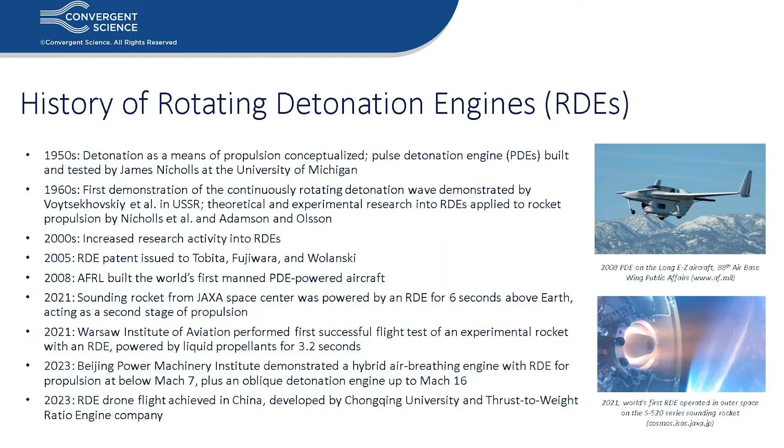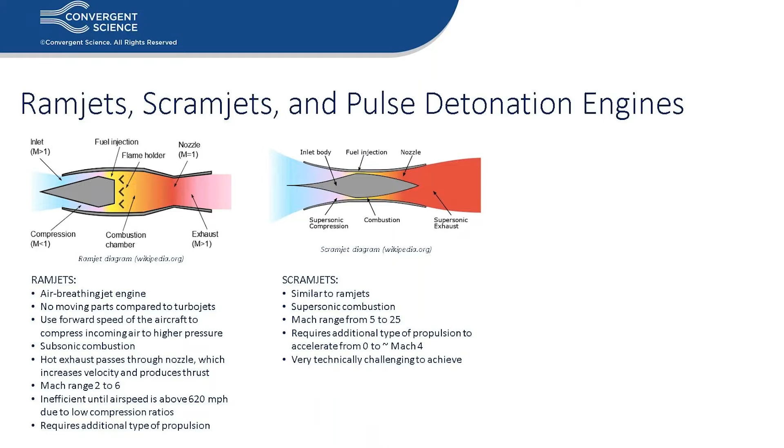Scramjets are very similar to ramjets, but the combustion happens in the supersonic regime. They operate in the 5 to 25 Mach range, and again require an additional type of propulsion to accelerate from 0 to about Mach 4. This is a very challenging problem since it's hard to achieve sustained operation, and hypersonic flight generates a lot of drag and heat.

Pulse detonation engines use a detonation wave, which increases thermal efficiency due to rapid compression of the mixture to high pressures and temperatures. They operate in the 0 to 4 Mach range, so they can be used to bridge the gap between subsonic and hypersonic regimes.

The thrust is proportional to detonation frequency, and detonation combustion can happen through either direct initiation or from deflagration-to-detonation transition (DDT). The main challenges are the very large amounts of energy required for direct initiation, or if using DDT, you need a long enough combustion chamber to achieve detonation. PDEs also require repeated initiation of the detonation, and the timing and control of fresh reactants into the chamber is very hard, resulting in a very limited operating frequency.

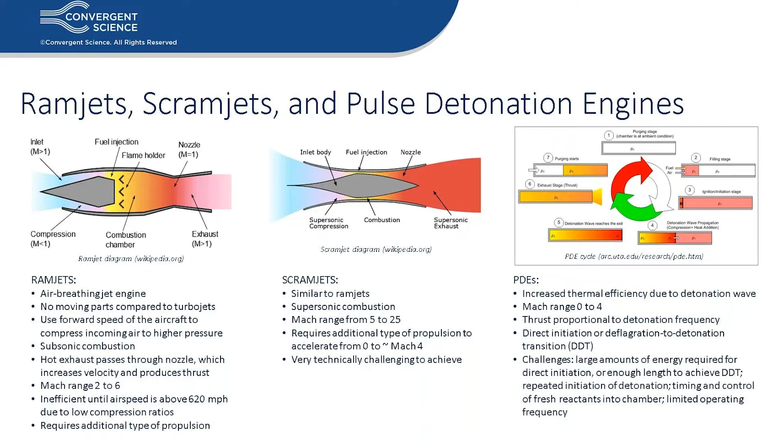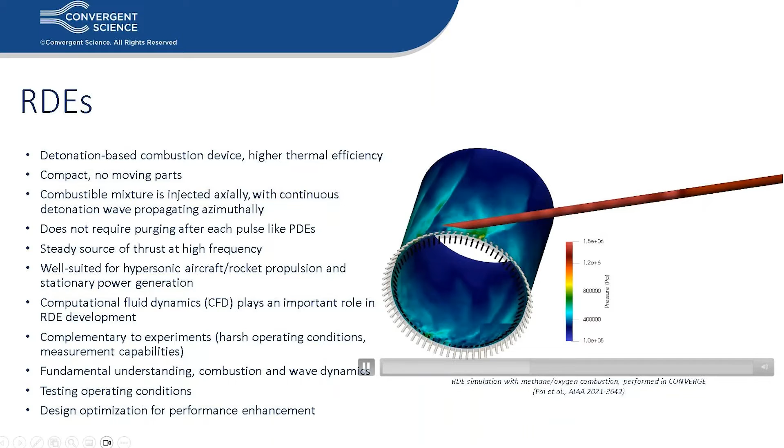So this is where rotating detonations come in. RDEs are essentially detonation-based combustion devices which achieve higher thermal efficiency due to using detonation. There are no moving parts, and the engine can be made very compact.

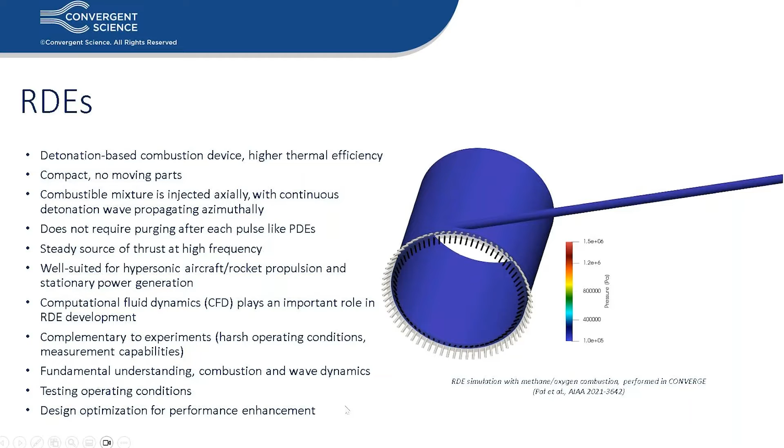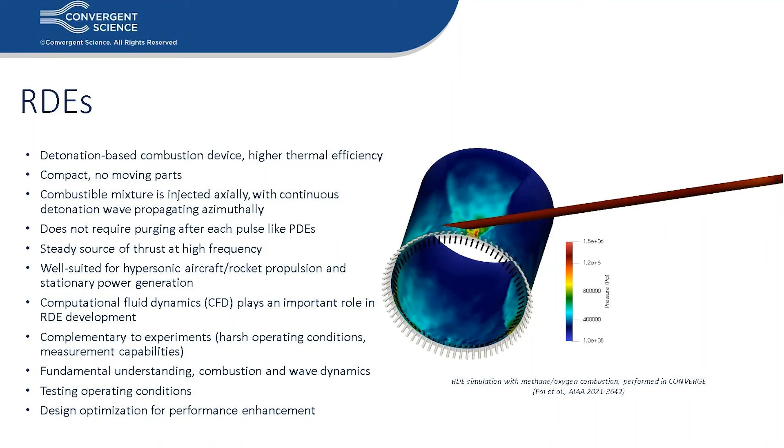The combustible mixture is injected axially through the nozzles, and once ignition is initiated, a continuously moving detonation wave or waves propagate azimuthally around the combustion chamber, as you can see from the movie. It does not require purging of gases after each pulse like PDEs do, and it can offer a steady source of thrust at high frequency once the detonation wave is established. It is well suited for hypersonic aircraft or rocket propulsion, and also for stationary power generation.

CFD plays an important role in RDE development. This is complementary to experiments where the engine encounters harsh operating conditions and certain measurements cannot always be achieved due to current measurement capabilities. CFD allows for fundamental understanding of the combustion and wave dynamics of RDEs, and we can test many different operating conditions as well as optimize the design for performance enhancement.

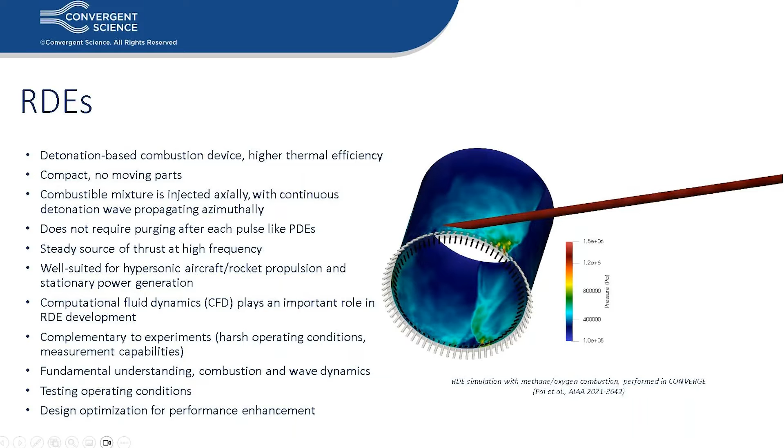So why should you use Converge for RDE simulations? Converge CFD has the capability of very accurate combustion simulation using our SAGE detailed chemistry solver, which you can also activate in regions where combustion is important to reduce computational expense. We have detailed reaction mechanisms through the Computational Chemistry Consortium, or C3, which include PAH and NOx chemistry, and tools for generating surrogate and multi-fuel mechanisms, including jet fuels.

Our code also does not require any meshing from the user. The mesh is created during runtime automatically. We also have Adaptive Mesh Refinement, or AMR, capability for variables like pressure, density, and velocity.

And this is very important as there is a wide range of scales in RDEs. For example, detonation cell width is about 1 to 1,000 millimeters. For example, with hydrogen-air combustion, the detonation cell measures about 10 millimeter at an equivalence ratio of 1. Nozzle diameters being about 1 millimeter, annulus width 5 millimeter, channel height 50, and detonation tubes being about 400 millimeter.

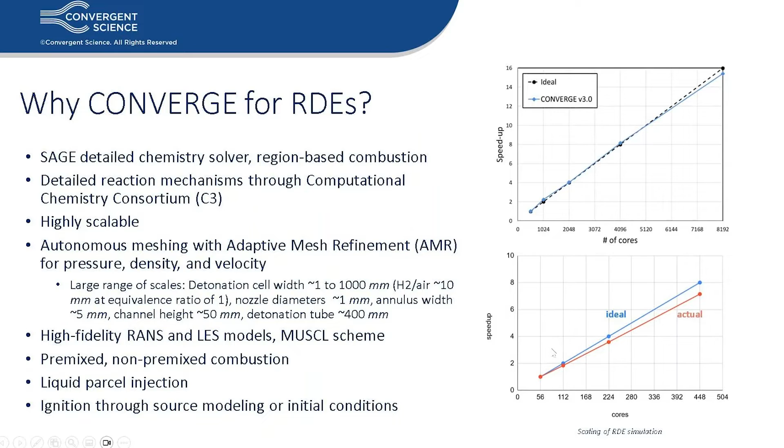So let's switch gears a little and talk about the differences between deflagration and detonation. Deflagration is combustion in the subsonic regime, where essentially Mach is less than 1, and pressure waves in front of the flame travel through the unburned mixture at the speed of sound, while the reaction front, or the flame front, is further behind it, traveling at velocities slower than the speed of sound. The propagation of the flame front is controlled by transport processes and chemical kinetics, and flame speeds are approximately 1 to 100 meters per second.

And in case of deflagration, the pressure decreases across the deflagration. So P2 in the burned mixture is lower than P1.

In contrast, detonation is combustion in the supersonic regime with Mach larger than 1. The pressure wave travels through the unburned mixtures at speeds greater than the speed of sound. The flame front is right behind the pressure wave, which energizes the shock wave. The propagation is then controlled by the shock waves, with flame speeds reaching about 2,000 meters per second. And pressure increases across the detonation with P2 greater than P1 as the shock compresses the unburned mixture.

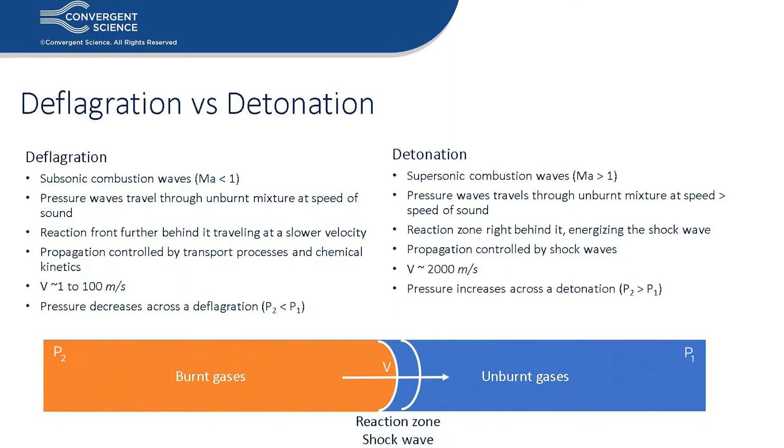So how do we initiate detonation? We can do direct initiation, which requires a high energy source to drive a sufficiently strong blast wave, so it's directly responsible for initiating detonation, but this requires a very large amount of energy.

Or we can do what's called deflagration to detonation transition, or DDT, which is essentially combustion that starts out as a deflagration with a relatively weak ignition source. As the flame develops and becomes increasingly turbulent, it accelerates until a shock wave is formed. This requires time, and the combustion chamber has to be long enough for turbulent mixing to develop into detonation.

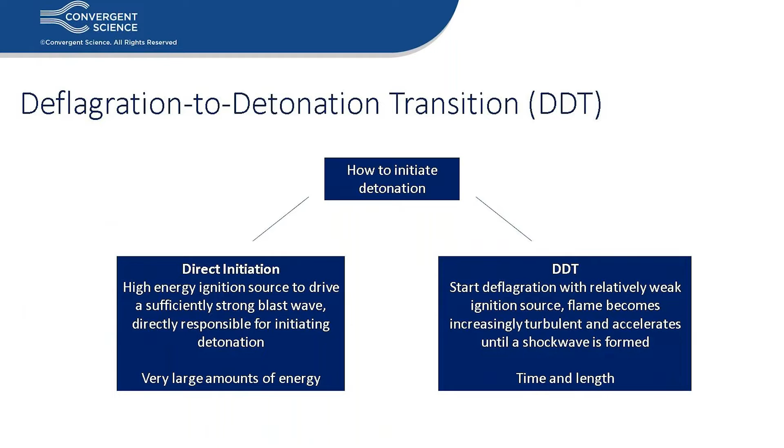So DDT was studied previously in a blocked channel using Converge CFD. The significance of DDT is, first of all, safety, such as storage of fuels or explosive mixtures in mining, in pipelines, and also it is used as a way to initiate detonation devices such as PDEs and RDEs.

There are significant challenges to this type of simulation, including a wide range of length scales from 4 to 10 orders of magnitude, and nonlinear interactions between flames, shock, turbulence, and boundary layer.

So to study this problem, we developed a 2D simulation with an obstructed channel for a controlled numerical study of various stages of DDT. This is to first understand the evolution of the flame and flow field and how to create the right conditions for detonation.

We also want to understand and control the transition to detonation and how to propagate and sustain the detonation wave through the unburned mixture. So on the right, you can see two types of channels.

One is just half of the channel with obstructions on just one side of the channel with some height and thickness. This is known as the unstaggered configuration, and what we do is we control the blockage ratio.

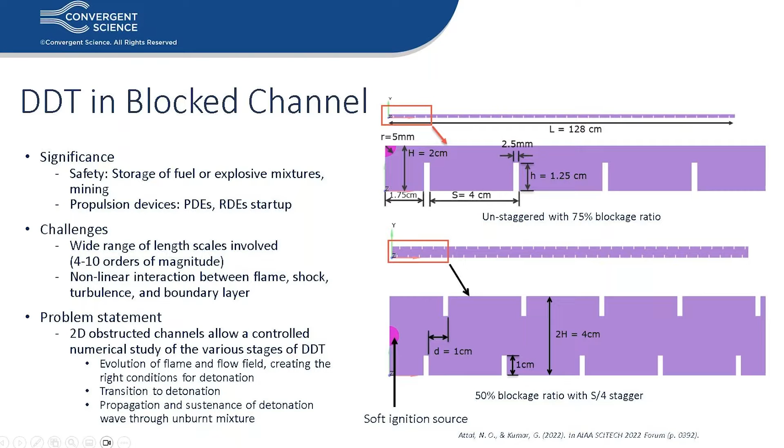So for the simulation, the physical models are as follows. For turbulence, we are using the dynamic Smagorinsky LES model. For combustion, we are using the SAGE finite rate detailed chemistry approach. The mechanism for hydrogen combustion contains 10 species and 21 reactions from Connaire et al.

The mesh settings are as follows. The base mesh is 2.5 millimeters, and we will use AMR for velocity, temperature, pressure, and OH, so that the minimum cell size achieved is about 78 microns, which allows us to capture the detonation front as shown in the figure below here.

So this is the progress of the flame front as time goes on. And you can see that as the flame develops, it becomes more and more turbulent and corrugated due to the interactions with the blockages, leading to increasingly faster flame speeds and developing into a detonation flame front.

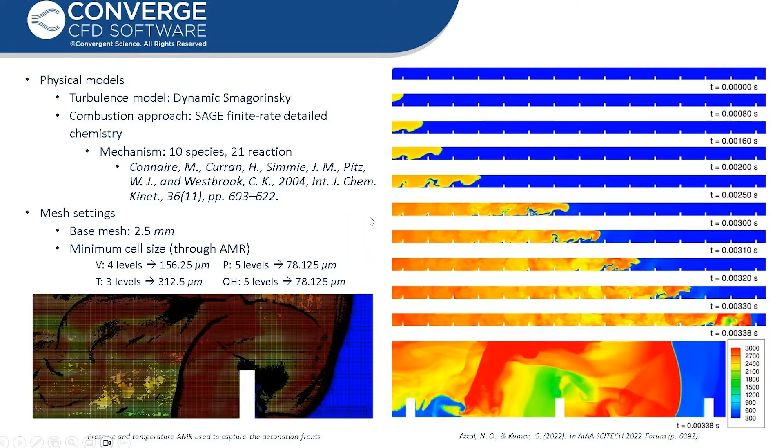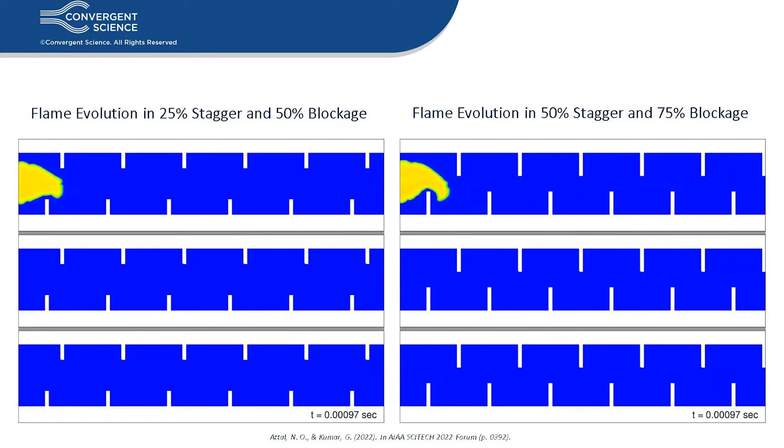So these two videos here show you the differences in flame evolutions with 25% stagger and 50% blockage on the left, and 50% stagger and 75% blockage on the right. What you can see is that the simulation on the right, which has the higher blockage as well as 50% stagger, develops into a turbulent flame much faster.

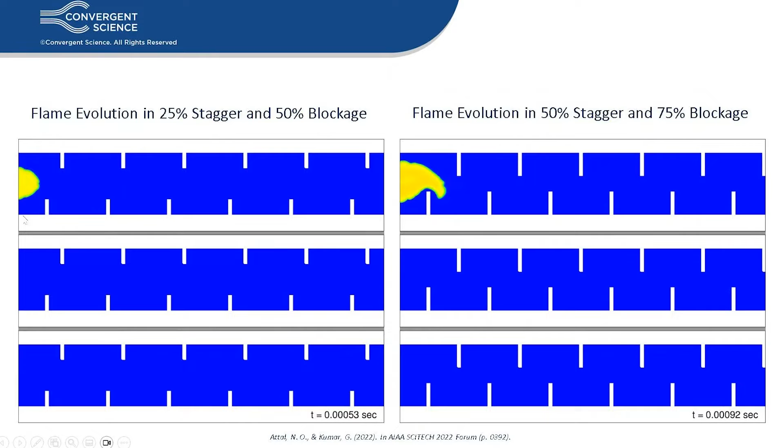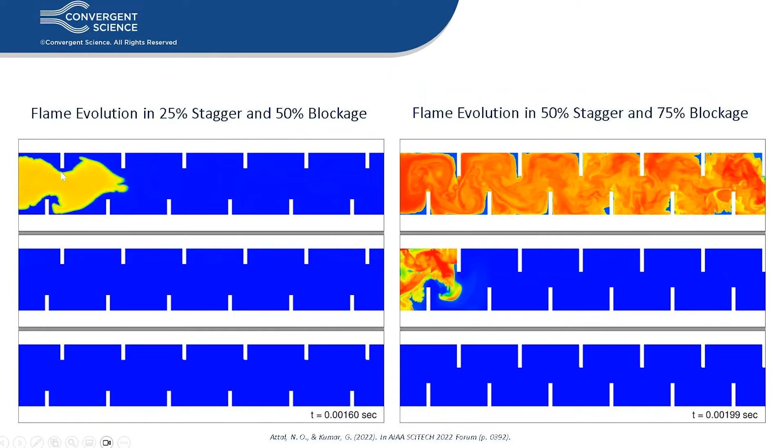This leads to faster deflagration to detonation transition. The simulation on the left still develops into detonation, but it does require a longer time as well as a longer channel length to transition to detonation.

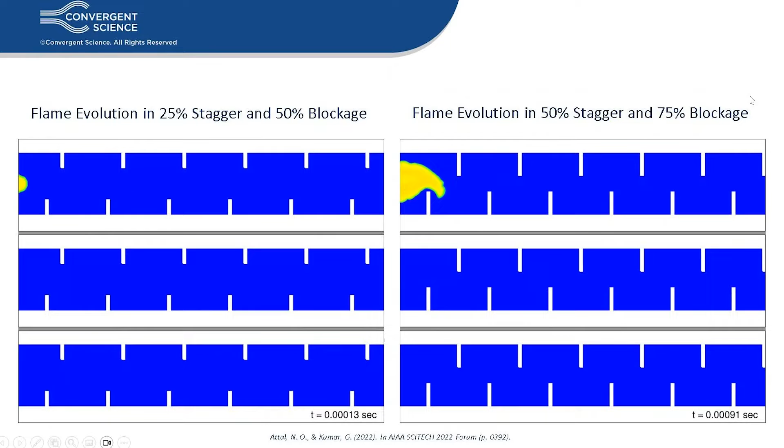So for different stagger and blockage ratios, the flame acceleration appears to be clustered. Each cluster corresponds to the same blockage ratio, but different stagger ratios. The inference we can take from this study is that flame acceleration is strongly correlated to the blockage percentages, but there's a weak correlation, or almost no correlation, existing between flame acceleration and stagger ratio.

This table here shows you the time it takes for detonation to be achieved from deflagration for the different blockage ratios and stagger ratios. One case actually did not achieve any detonation. As the blockage ratio increases for each stagger ratio, you can see how the transition is happening in less time.

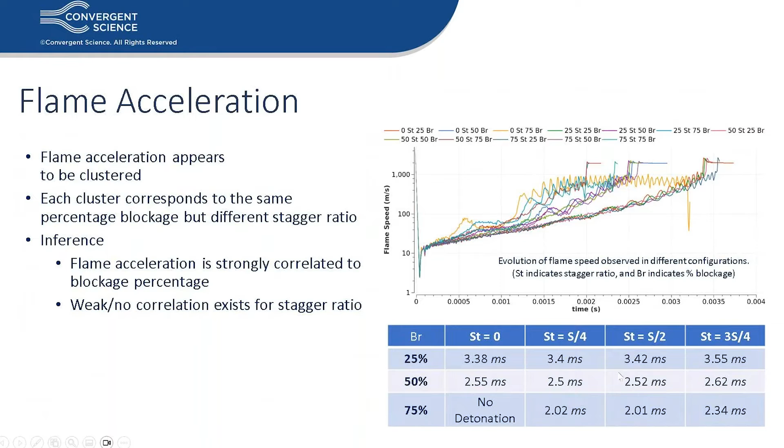We have also done investigations into deflagration to detonation transition using simulations with detailed chemistry for inhomogeneous and homogeneous hydrogen-air mixtures, and validated against experimental results.

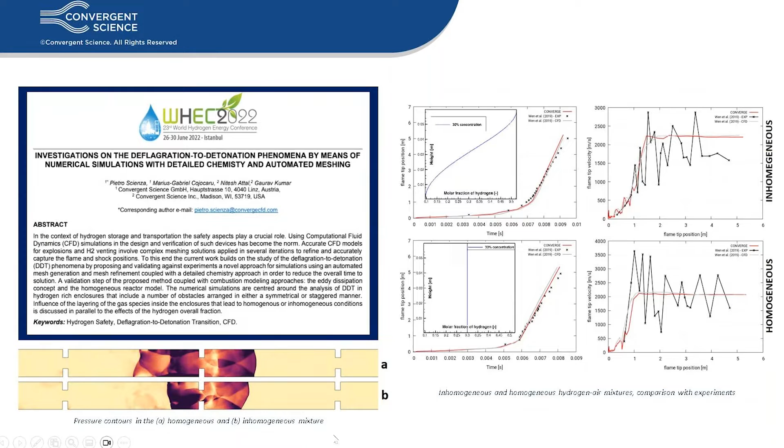You can see that on the right here, where experiments are shown in black symbols, the simulations performed by the experimental researcher are in gray, and the Converge simulations are in red. You can see that we achieve very similar results compared to the experimental as well as the previous numerical simulations.

So I did mention the Computational Chemistry Consortium, or C3, from which we can get mechanisms for a whole bunch of different fuels, including hydrogen, methane, and other fuels that are important for RDEs.

So we have validated the C3 mechanism to see if it achieves the Chapman-Jouguet flame speeds using 3D simulations of a detonation tube. The detonation tube is shown here very simply. It has adiabatic slip walls with Dirichlet pressure and Neumann velocities at the outflow.

The initial mixture contains a stoichiometric mixture of the fuel and air or oxidizer at a constant temperature, and different pressures were simulated. A short ignition source was used to initiate the combustion, and the flame is then allowed to travel along the tube until the deflagration to detonation transition happens.

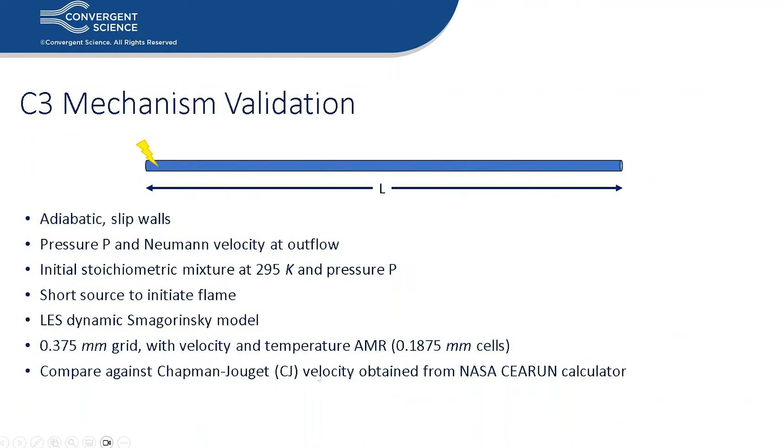We use the LES Dynamic Smagorinsky model for subgrid scale modeling. The base grid is about 0.375 millimeters, and we used velocity and temperature AMR so that the smallest cell size is about 0.18 millimeters. We compared our flame speed results against the CJ velocity obtained from a NASA CEA calculator.

Here I'm showing two different validations, one for hydrogen-air and another for methane-oxygen. The CJ velocity from NASA is in blue for both simulations. The C3 mechanism velocity is shown in red. We also compared another mechanism that is typically used: for hydrogen-air, we use the Connaire mechanism shown in yellow, and for methane-oxygen, we use the Xu mechanism in yellow.

We also tested 5 different initial pressures from 1 to 5 atmospheres. If you look at the hydrogen-air combustion simulation, you can see that at low pressures we underpredict the CJ velocities, whereas at high pressures, the C3 mechanism and the Connaire mechanism overpredict the flame speed. This can be due to many different reasons, including grid resolution, as we did not perform a grid study for the simulation. That can be one area of improvement.

In terms of the methane-oxygen simulation, the C3 mechanism again underpredicts the flame speed at lower pressures, and at higher pressures we overpredict the flame speed. But compared to the Xu mechanism, the C3 mechanism is actually predicting more accurate velocities on the low pressure side.

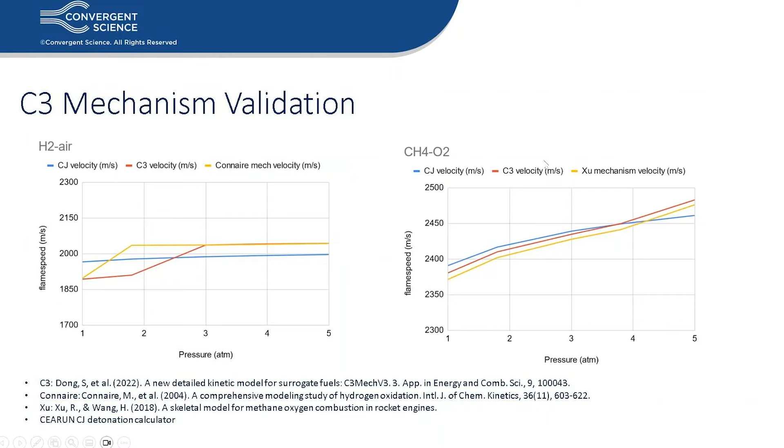In terms of supersonic simulations, we have performed them in Converge CFD for hydrogen in a vitiated airstream. The computational domain looks as follows. The vitiated air is coming in on the left at an inflow boundary condition of 1260 Kelvin for temperature, and at a high inlet velocity of 2.44 Mach.

It exits on the right with Neumann outflow boundary conditions. The walls are cold with no slip applied, and 100% hydrogen is introduced from the bottom of the computational domain at 0.13 Mach and about 300 Kelvin.

Combustion is simulated with SAGE detailed chemistry, turbulence with RANS RNG K-epsilon model, and a 4 millimeter base grid was used with level 3 AMR.

Results of H2O species by volume fraction were compared at a specific location close to the outlet for different Y values. Compared to measurements, shown in black, our results with SAGE, shown in blue, compare very well, in contrast with the equilibrium model shown in red, which was performed by the original authors.

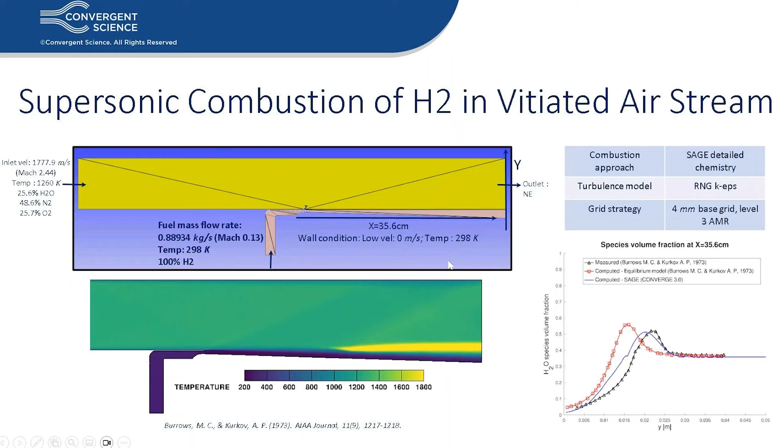So we can see that supersonic combustion can be simulated in vitiated airstreams in our code.

We have also created a 2D RDE model, which is essentially an unwrapped version of our 3D RDEs. This is good for quick simulations where you want to vary operating conditions, optimize solver settings, do grid sensitivity studies, and change the fuel without having the need to do expensive 3D simulations until you need to do them.

For this simulation, we use the LES two-equation K-epsilon model. Again, we use a detailed kinetic mechanism for hydrogen-air, extracted from the full C3 mechanism, with 12 species and 37 reactions. We use the finite rate SAGE detailed chemistry solver for combustion modeling.

We also used adaptive mesh refinement for velocity, temperature, and OH gradients to trade off accuracy and computational expense, and performed a grid sensitivity study by varying the base mesh and minimum mesh grid sizes.

Periodic boundary conditions were applied to the left and right of the boundaries, and 2D boundary conditions to the front and back of the computational domain.

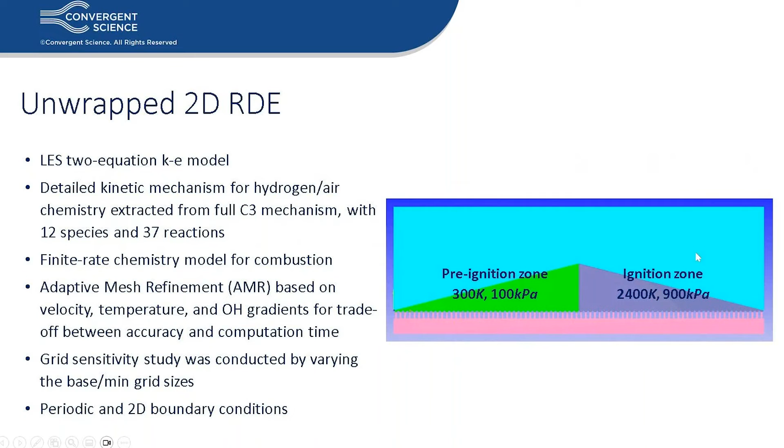This type of initialization works well for hydrogen-air mixture detonation. The wave speed reaches approximately 1668 meters per second, and peak cell count in the simulation is about 400,000. The simulation took about 43 hours on 4 cores for a 3 millisecond run, and this example case is available in Converge Studio for you to play around with.

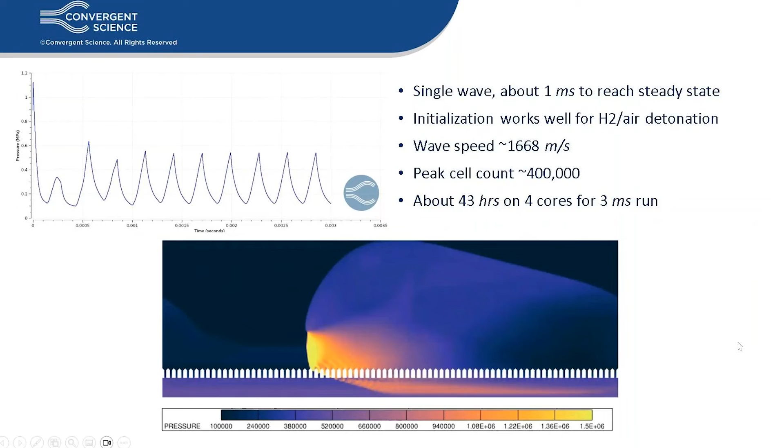Moving on from the 2D simulations to 3D simulations, we demonstrate the AFRL Hydrogen-Air RDE, which was performed by Pinaki Pal at Argonne National Lab.

The experimental setup of this engine contains a pre-detonator tube where ignition is initiated, and also high frequency and low frequency pressure transducers at different locations, which provides data for comparison against the numerical results.

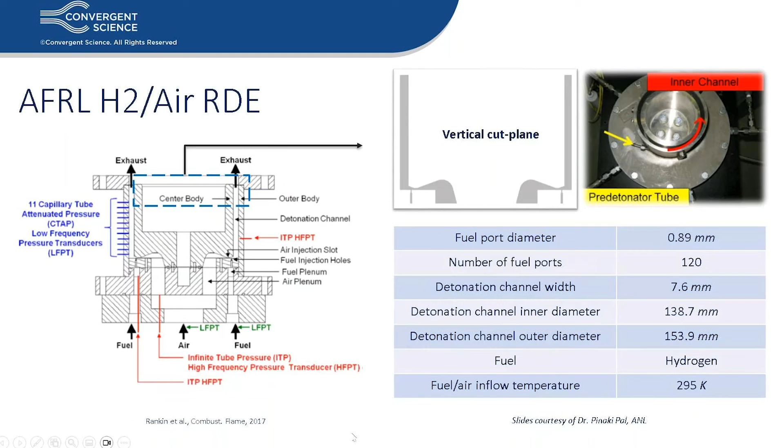So you can see the computational domain of the RDE with the same pre-detonator tube as the experiment, the 120 fuel ports that you see, the air inlet, and the RDE annulus. A spark is used to ignite the fuel-air mixture in the pre-detonator tube.

They use the unsteady RANS realizable K-epsilon model to model the turbulent flow, detailed kinetic model for hydrogen-air chemistry with 9 species and 21 reactions, which was first tested for simple 1D detonation simulations. They use the SAGE finite rate chemistry model for combustion.

And again, AMR is used for velocity, temperature, and density gradients for trade-off between accuracy and computational time. A grid sensitivity was also performed, and they simulated 3 different cases where they vary the airflow and the fuel flow rates, leading to approximately equal global equivalence ratio of 1 for all 3 cases. And these 3 cases have different number of waves as was found in the experiment.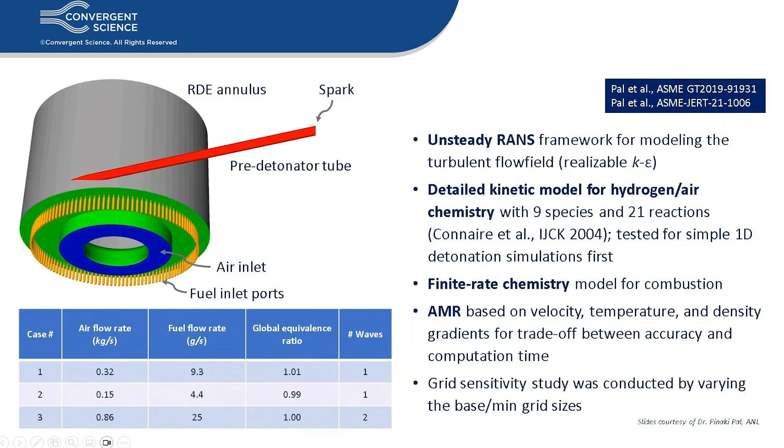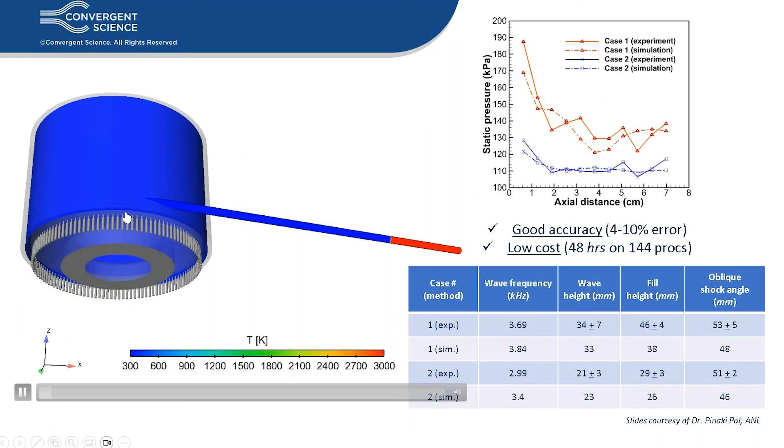So the simulation results is shown here in this animation. The pre-detonator tube helps to ignite the fuel-air mixtures coming in from the bottom of the RDE. And as the detonation wave develops and traverses the annulus, fresh fuel and air is coming in from the inflow boundaries below, allowing the detonation wave to be sustained through the simulation.

They compared the static pressures for cases 1 and 2 against experiments, which is shown in the solid lines. And you can see that they got really good results with about 4 to 10% error in accuracy.

It was also a low-cost simulation as it only took them about 48 hours on 144 processors. And comparing to experimental wave frequency, wave height, fill height, and oblique shock angles, they were all within experimental uncertainty, except for perhaps case number 2 for the oblique shock angle, which was much lower than the experimental value.

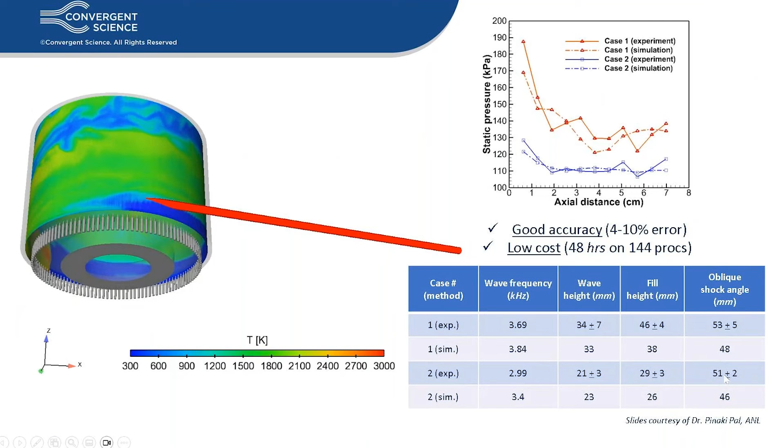Mode transition in hydrogen RDE was also studied using unsteady RANS and SAGE detailed chemistry solver. Essentially, any changes in inlet conditions such as pressure, mass flow rates, or fuel reactivity can lead to abrupt changes in number of detonation waves in an RDE, which is known as mode transition.

So if you look at this video here, if I start it over, you can see that there is a single wave traveling, but then at some point there is a second micro detonation happening, which results from interaction of burnt products with fresh mixtures that leads to essentially mode transition from 1 to 2 detonation waves.

So you can see that there's now 2 detonation waves traversing the combustion chamber.

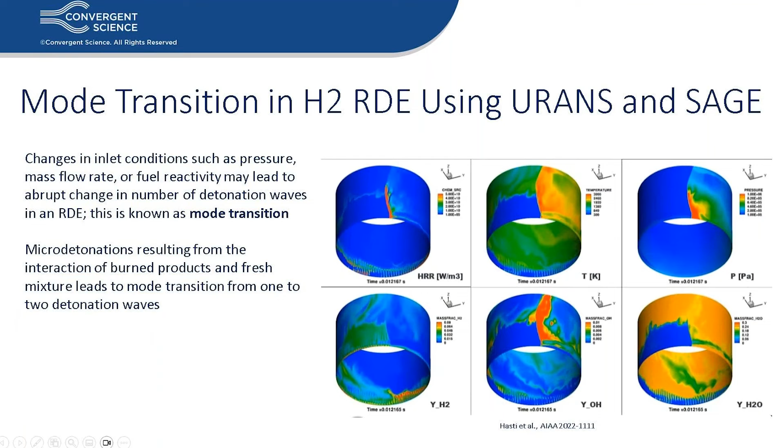High-fidelity LES has also been used to model RDEs with hydrogen-air mixtures. A wall-modeled LES framework was used with the dynamic structure subgrid model for an RDE. The peak cell count, since this is an LES simulation, was about 19 million, and runtime was about 36 hours on 500 processors per millisecond of simulation time.

In this simulation, a single wave develops in the RDE. Snapshots are shown on top here for temperature, pressure, and density, and you can see that they identify the different areas of the shock and combustion regions in the plots above.

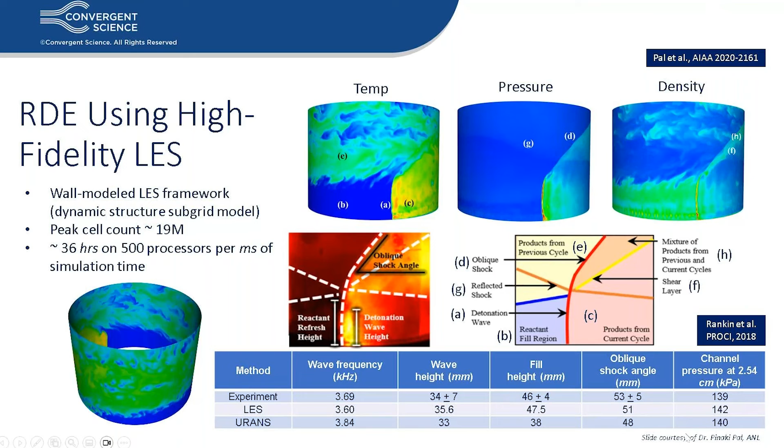Now, when compared to experiment, LES seems to be more accurate than RANS in this case setup, achieving very good results for wave frequency, wave height, fill height, and oblique shock angle. It was overestimating the channel pressure at a certain location compared to the unsteady RANS simulation, but this can just be due to spatial distribution of the pressures being a little different.

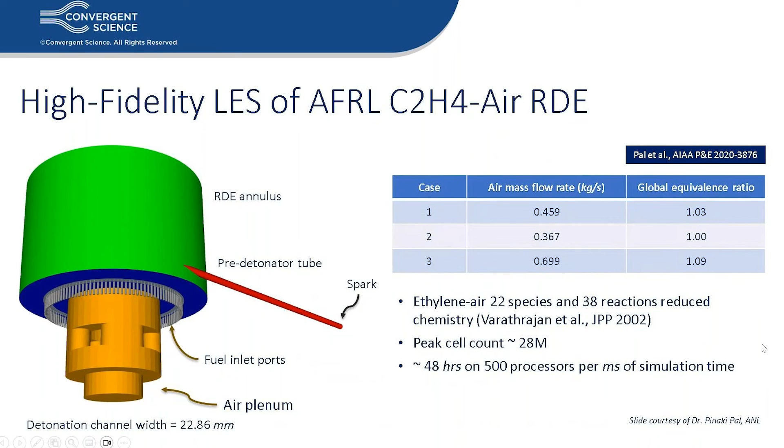What they found was essentially a weak lifted azimuthal wave due to delays in mixing and reactions. There is a high temperature zone that trails behind the azimuthal waves, as you can see here, which constitutes commensal combustion—this is essentially unwanted or secondary combustion behind the detonation waves. Another form of secondary combustion is the parasitic combustion that happens in front of the detonation wave in the refill zone.

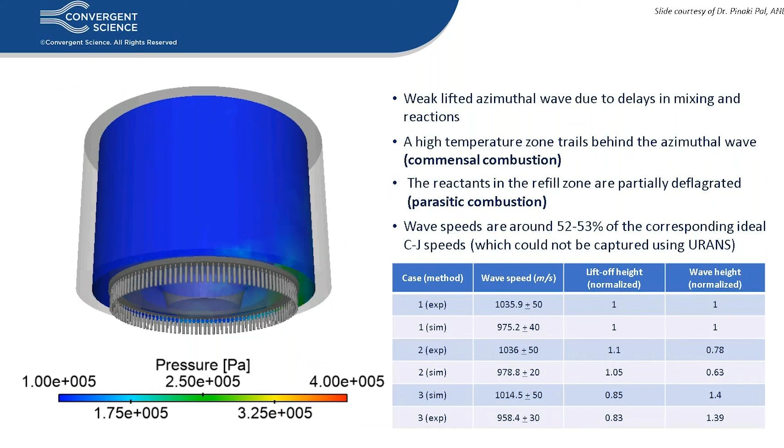This simulation achieved wave speeds of about 52 to 53% of the corresponding ideal CJ speeds, which could not be captured using unsteady RANS. Compared to experiments, the simulations are slightly under-predicting the wave speeds for the three cases, and very slightly under-predicting the liftoff height and the wave height for cases 2 and 3.

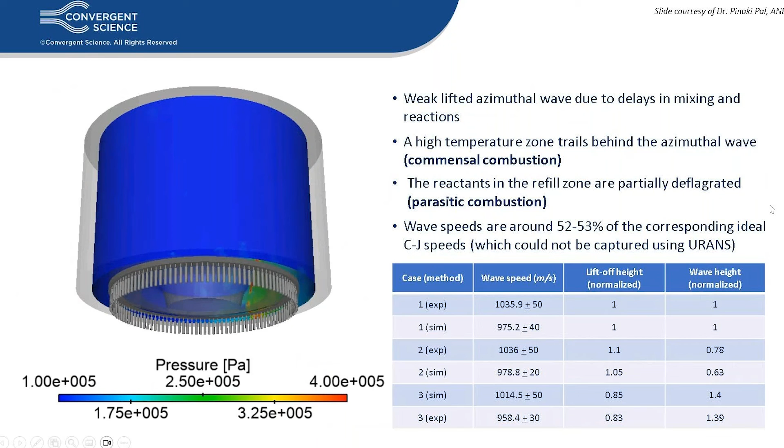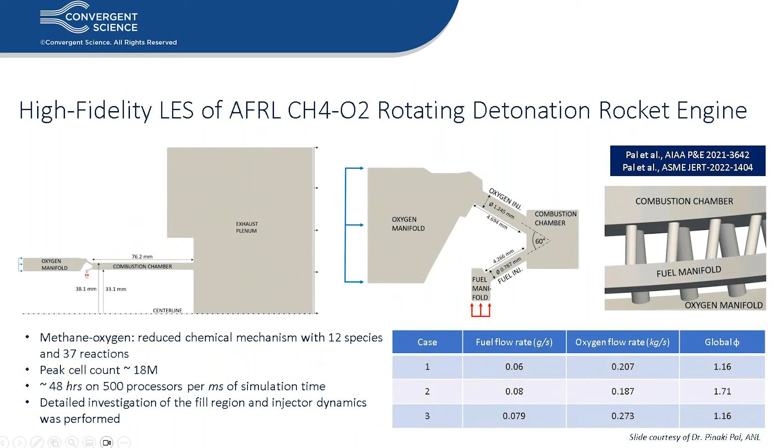As can be seen from this animation, mode transition occurs in the simulation, where essentially one wave develops into two waves due to micro detonations and interactions of the large combustion structures. They were able to achieve good comparisons with experimental data for the three cases: the baseline, high equivalence ratio case, and high mass flow rate case.

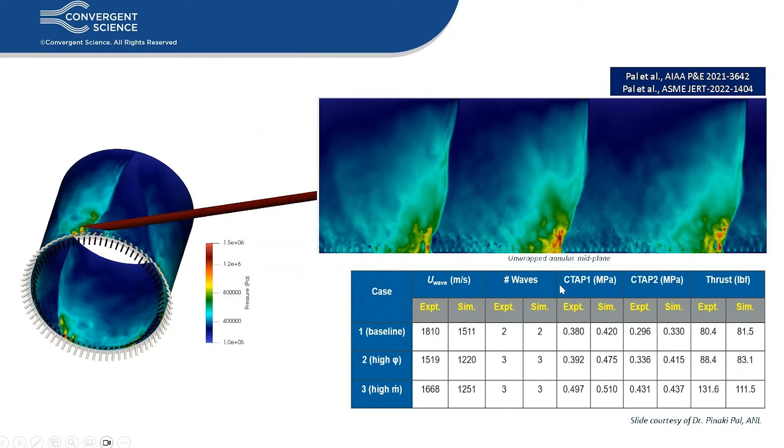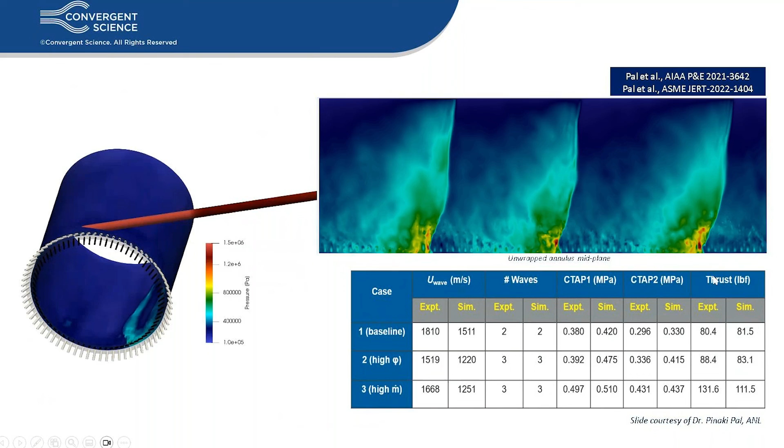They were able to achieve the correct number of waves and very close pressure values to the experiment, which is CTAP 1 and 2. The wave speeds, if you compare them to experiments, are underpredicted, but the amount of thrust they were able to obtain from the simulations was very close to the experimental values.

So in summary, Converge is a very powerful CFD tool for modeling RDEs. It has several features useful for RDE simulations, including AMR based on velocity, temperature, and/or species, inlaid meshing capability if needed, scalability, high-fidelity RANS and LES models, and a fully coupled detailed chemistry solver.

Converge can capture accurate combustion dynamics of RDEs using high-fidelity modeling approaches. Both air-breathing and rocket RDE configurations with a variety of fuels—hydrogen, ethylene, and methane—have been simulated using Converge, and these simulations were validated against experimental data, accurately capturing the detonation wave characteristics with high predictive accuracy. We're continuing to validate our features and improve our case setup recommendations for RDEs.